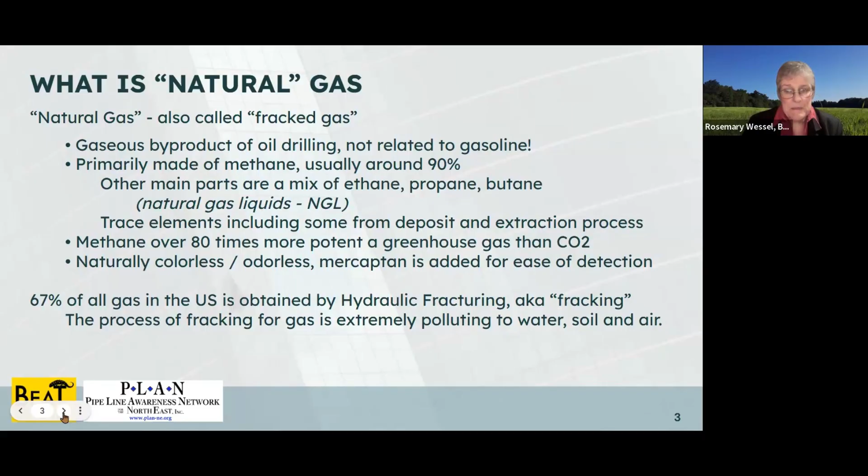from the extraction process. Methane is over 80 times more potent a greenhouse gas than CO2. So when it leaks into the atmosphere, it has a lot more punch than if it's actually burned. It's also naturally colorless and odorless. Folks may be familiar with the smell that they get when they get gas service. You get a little scratch and sniff card. That's actually mercaptan. That's a chemical that's added to the gas so that it can be detected in your home.

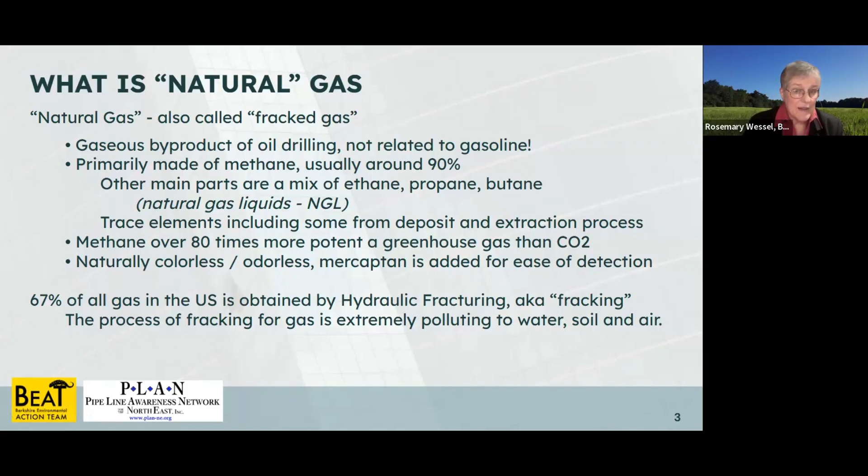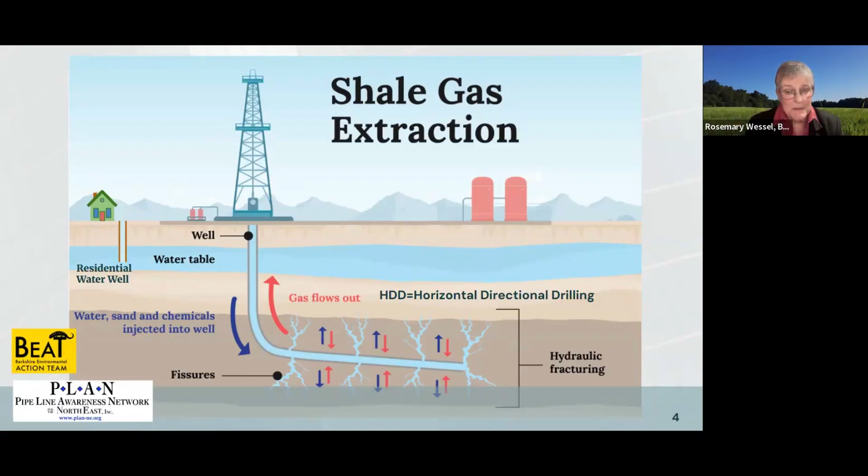67% of all gas in the US is obtained by hydraulic fracturing, otherwise known as fracking. And the process of fracking gas is extremely polluting to water, soil, and air at the extraction site. Shale extraction is how they drill the gas out of the ground. It uses a process called horizontal directional drilling. So they go down first and then they can bend at like a 90-degree angle. And then they break apart the rock to get the gas pockets out of there. A lot of people think that you just put a well down and the gas just bubbles up, but they actually have to fracture the rock to get it out.

So the Marcellus Shale is the one that's closest to us, and the Utica Shale is underneath that. That's in New York, Pennsylvania, West Virginia, and Ohio. The Marcellus Shale is about 4,000 to 8,500 feet down, and way down below that, 6,000 to 14,000 feet is the Utica Shale. And the proximity of New England to this large source is one of the reasons why they keep trying to get more gas through here. They keep seeing it as an easy thing that they can tap, but it's much more complicated than that. So we're going to take a look at the infrastructure of the gas transmission lines.

So why pipelines? Why does the industry like to use pipelines? It's a safer means of transport for gas, safer than vehicles or trains, but it still has accidents. There were 263 significant incidents in 2024 alone. It only becomes liquid when it's cooled, then it's LNG. That's when it goes into storage tanks, transported by ship, through truck. But the process of gasification and degasification has a lot of its own problems. So that's not any better way to transport.

So yeah, the intrastate pipelines are the distribution networks of our gas utilities, known as local distribution companies or LDCs, you'll hear them called, like Eversource and Boston Gas of National Grid and Berkshire Gas. And the interstate transmission gas pipelines are the pipes that move that gas around the US from those shale plays that Rose was talking about. For us, they bring the gas from states like Pennsylvania or up from the Gulf or down from Canada.

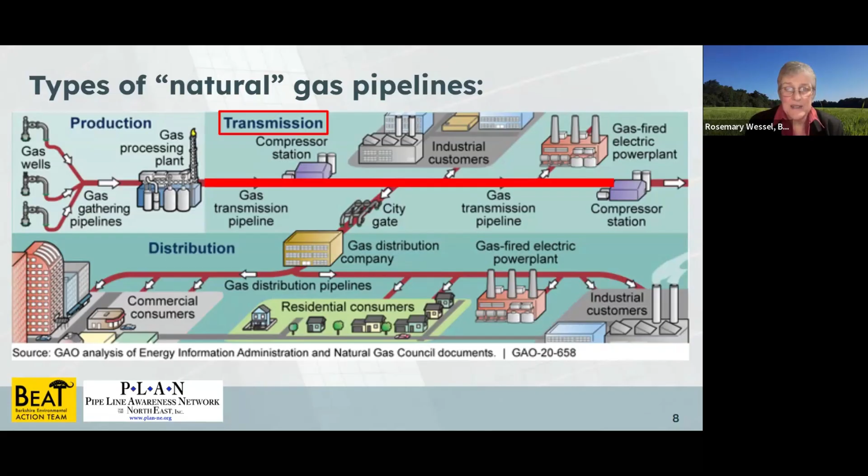And then at the end use, there are gate stations and laterals that bring it to distribution companies. Some of those laterals go directly to industrial users. The rest goes to gas companies, like your Eversource, your National Grid, Unitil, Berkshire Gas, that are part of the distribution network. And again, we're looking at the transmission pipeline, which has its own set of infrastructure.

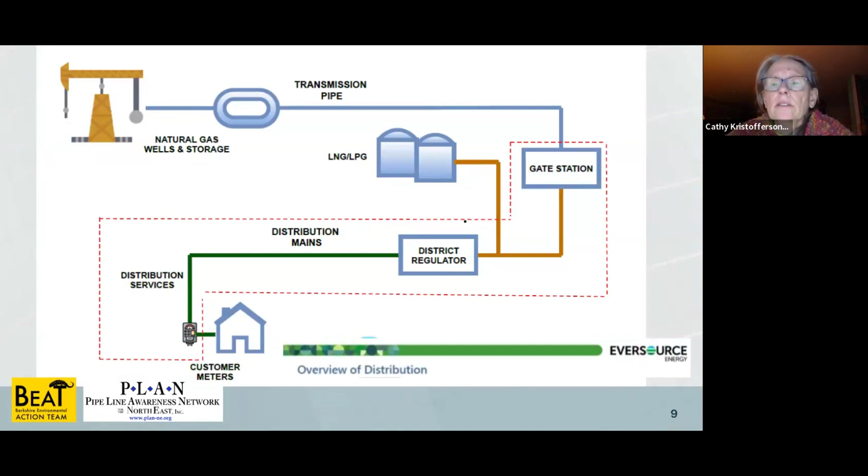Next. And this is a diagram of the typical gas system highlighting the distribution system, taken from an Eversource filing. You can see their system in the middle there outlined in the red dashed area. Before them is the interstate system transmitting the gas from the well to their system. And after their distribution are the customer service lines and meters on the buildings.

Next. And I wanted to include this map. It shows just how many pipelines we have in the US. The blue lines are all interstate pipelines, and the gray ones are intrastate. Those tend to be gathering lines and smaller laterals that bring gas to the main transmission pipeline systems.

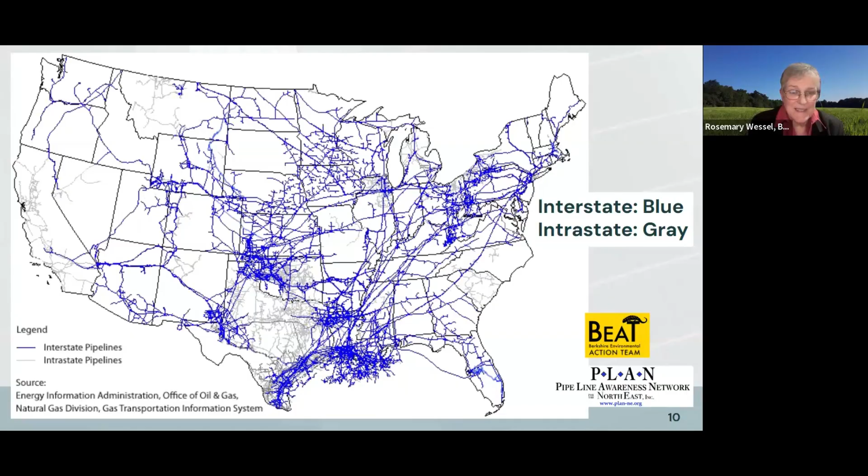And these are the existing gas transmission systems in the Northeast. You'll see there are two blue ones coming in from the west. Those are both Tennessee Gas pipelines. One comes through Pennsylvania and up into Connecticut to Massachusetts. The other one comes across upstate New York into Massachusetts. And the other one that we deal with a lot is the unfortunately named Algonquin Pipeline. That's an Enbridge company. It comes up through Connecticut into Rhode Island and Massachusetts.

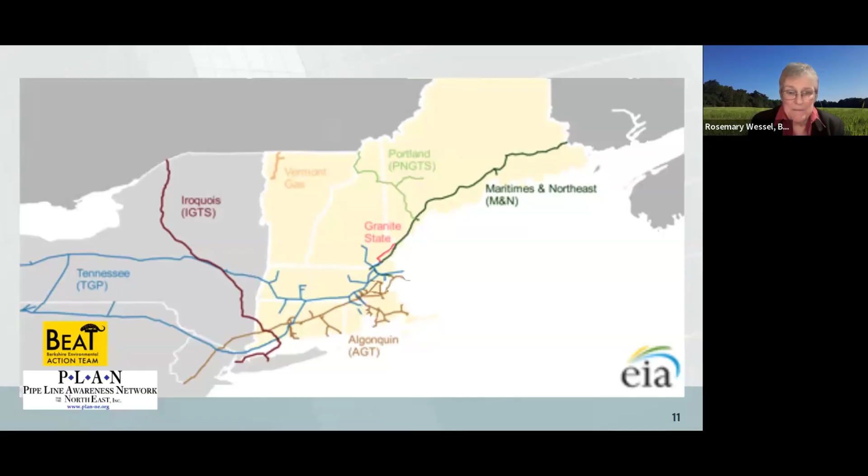Then there's also the unfortunately named Iroquois Pipeline, which comes out of Canada down through New York, part of Connecticut, and then back around to Long Island. There's also Maritimes and Northeast, which goes up towards the Canadian Maritimes. The other two actually bring gas out of Canada. That's the PNGTS and Vermont Gas. The others are all bringing gas up from the Marcellus Shale and areas further south. I think the Iroquois brings gas down too.

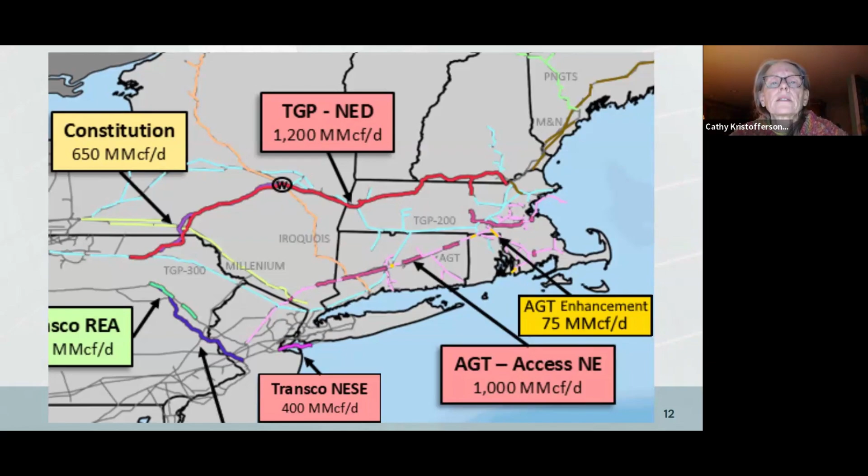Okay, so when you're looking at the actual structure of the pipeline, it's really important to make note of the diameter of the pipeline and also something called the MAOP. That stands for maximum allowable operating pressure, and that's the highest pressure at which a pipeline system is allowed to operate. The pipeline companies prefer to have the highest MAOP they possibly can so that they can pack as much gas as possible into a system.

The intended MAOP determines the strength and the thickness of the steel used in the pipeline walls. Some of that depends on how dense the development is around a pipeline. We have an appendix to these slides that gets into the different classes. So if you're in a rural area, you get a thinner pipe. If you're in a more urban area, you get a thicker pipe that has more strength.

MAOP combined with the pipeline's diameter determines the potential impact radius and affected impact radius. So we're going to get more into what those mean in the next few slides. Sometimes pipelines are designed for a higher pressure, but they promise to run at a lower pressure, but then they'll up it after approval. They'll either apply for a waiver to go with a higher pressure, or they'll have another proceeding to up the pressure on a pipeline after approval. That's something to look out for when a pipeline is applying for permits.

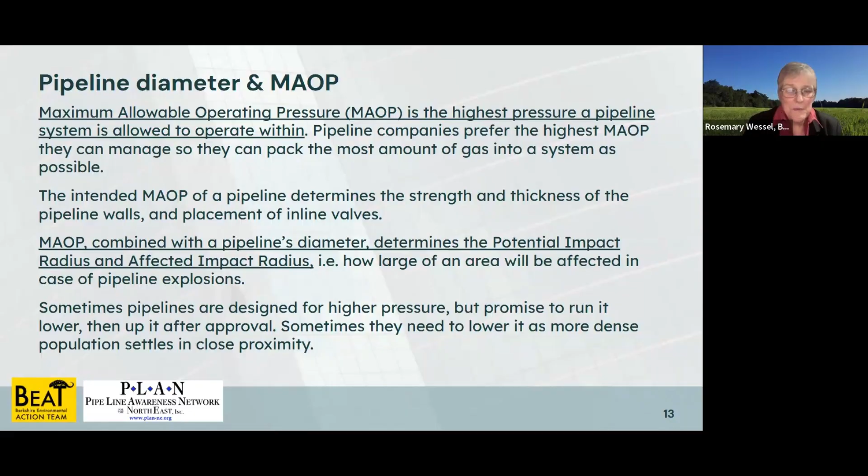Yeah, and this slide shows the various sizes of pipes we've seen installed in our area recently. The AGT West Roxbury lateral up there in the top left corner had 16-inch pieces and 24-inch pieces. The two bottom corners both are 42-inch pipelines in Connecticut and New York, and in the middle shows the Tennessee 36-inch pipe added. It's the third pipe in parallel in that existing and expanded easement through our state forest in Sandisfield.

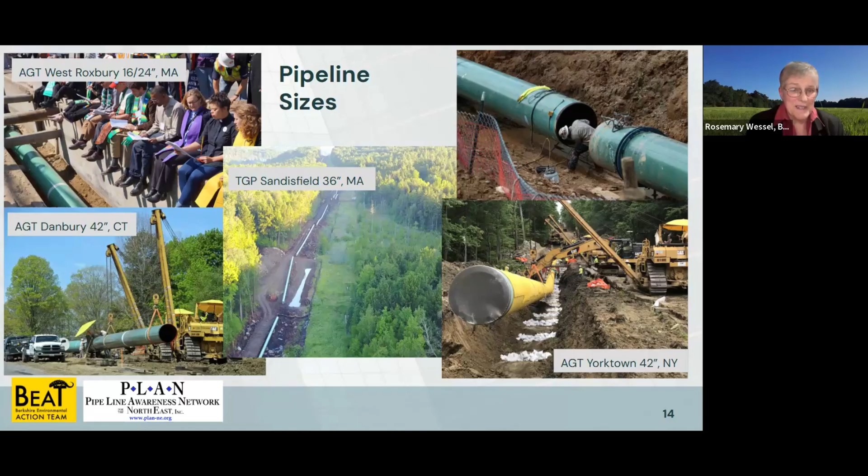And the top right corner, I just put in there, it's not in our area, but it gives you a really good idea of how huge these pipes are, because that's a guy standing there welding the two pieces together. Yeah, a 42-inch pipeline is basically chest height. Yeah. Large. Next. So this is more detail on the potential impact radius.

It's worth noting that the industry itself also refers to this as the incineration zone. So this is the zone around a pipeline at which things are really destroyed if there's ever an explosion. It can be severe damage or total damage within that zone in case of an explosion. And it's worth noting that that impact radius is a radius. That means that the zone, however many feet it extends, is on either side of the pipeline. It depends on the pressure at which the pipeline is operating at the time, times the diameter of the pipeline.

The affected impact radius is an outer ring outside of that, where damage happens, it's just not as severe. And also that's calculated using the same MAOP and diameter. Less damage is likely. It includes singeing vegetation, maybe if you have vinyl siding, your vinyl siding might melt, your windows might implode, but it's not total structural damage like in the PIR. It's also the zone that's most likely to be evacuated during gas leaks or other incidents.

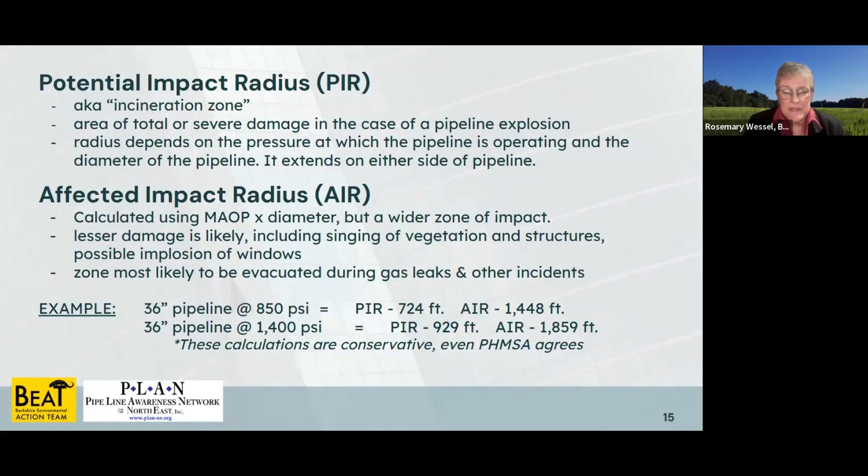And I made a couple of examples comparing different pressures. If you have a 36-inch pipeline at 850 pounds per square inch, the potential impact radius is 724 feet. But if that same pipeline then ups its pressure later on to say, no, we'd like to run at the 1400 PSI for which it's designed, that goes up to 929 feet.

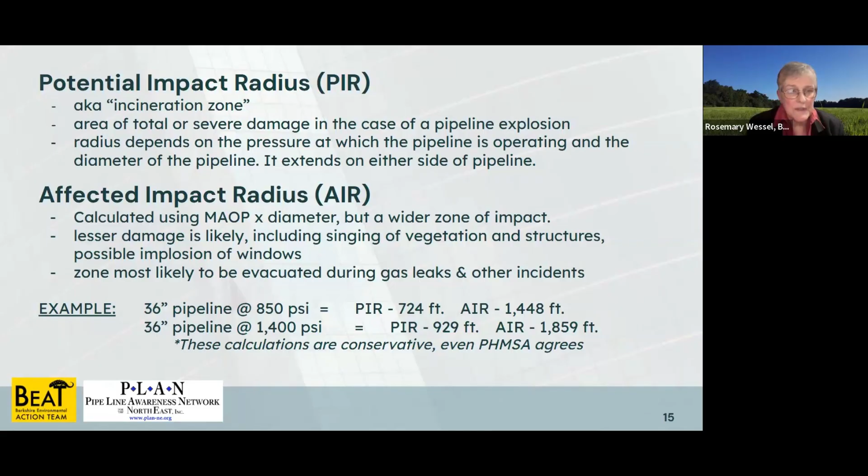And these calculations are fairly conservative. Even the Pipeline and Hazardous Materials Safety Administration that designed this agrees that it's a fairly conservative calculation. They can be higher depending on a whole host of conditions at the scene.

The PIR also helps determine high consequence areas. High consequence areas are zones within 220 yards of a pipeline with high occupancy dwellings or sites where people congregate. So this can be hospitals, daycares, prisons, retirement homes, assisted living, anything where a lot of people congregate that happen to be in the PIR or the AIR.

And I took a couple of examples from the currently proposed intrastate pipeline. That's the Eversource pipeline that they want to put through Longmeadow and Springfield. We mapped out the actual pipeline route and identified the potential impact radius in red, and then the affected radius in yellow. And you can see where it goes by the Basketball Hall of Fame.

The whole front of the building is well within the PIR. Also, about half of the Hilton Garden Hotel is within that space. And a little bit further down the pipeline route, you get Longhill Street Apartments. That's within the PIR.

Sumner Place Apartments is within the AIR, so they're likely to sustain damage. Also, Sumner Avenue Elementary School is right in there. So when there's a proposal, it's really handy if you can get a map of where it's going to go and get someone to do some mapping to figure out what's going to be in danger.

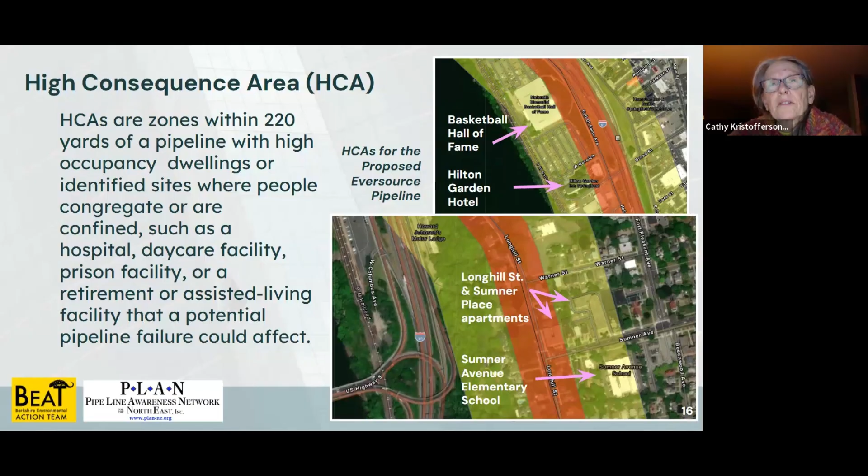And also, Rose, that's Route 91 in there. Yeah, it also overlaps Route 91 and that lovely interchange for the Longmeadow exit.

So accidents and incidents: as noted, there are several hundred significant incidents every year in the U.S. The average deaths is about 12 per year and 55 injuries per year associated with these. And it can take the form of fires, explosions, or leaks. The most common cause is corrosion, particularly where a pipe has a bend and a weld for that bend, or if there's a juncture where the weld started to corrode. It can be equipment failure. It can also be things like dig safe accidents where somebody struck a pipeline.

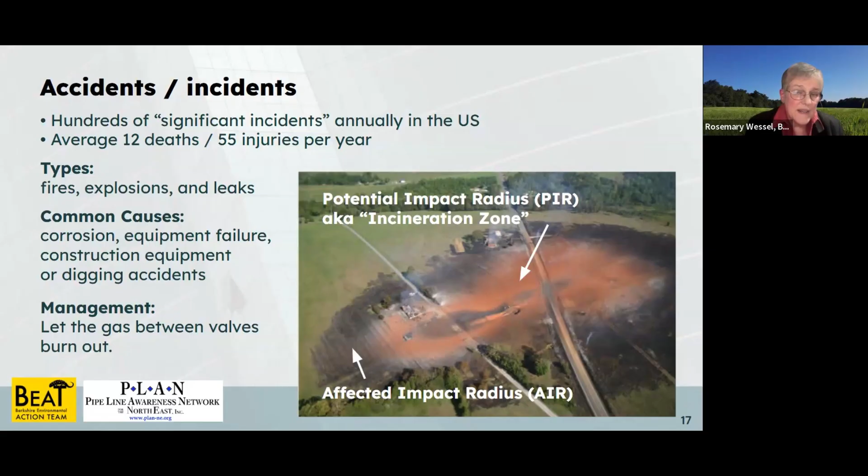But what you can really see is where the incineration zone is. Most of them, if you look them up, you can see picture after picture from different explosions. There's an area that looks red, and that's where everything has just been vaporized by the size of the explosion. And then the outer ring is where the affected impact radius is. So that's where vegetation gets singed and houses may sustain damage, but probably not structural damage.

And when determining when there's looping, that's when they lay pipelines down next to each other, parallel to each other. They say that you want to look for the PIR for both pipelines on the outer edge, and that will determine what the actual potential impact radius is. But it's worth noting, for instance, some of the AGT enhancement has a much larger pipeline being laid down next to a smaller pipeline. That larger pipeline's PIR is going to outweigh the smaller PIR of the smaller pipeline. So you need to look at what the actual radius is from the largest pipeline to determine what the zone is.

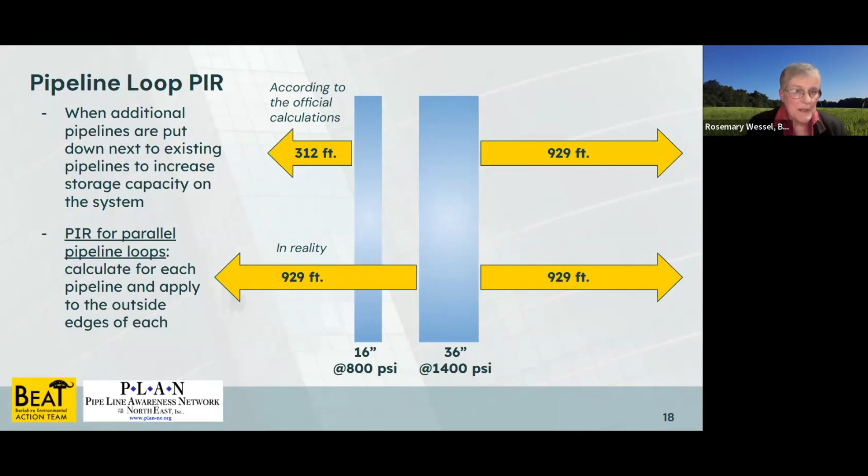So that would leave both pipelines within the other's incineration zone, correct? Depending on how far apart they are, yeah.

And this slide is a screen grab from an Enbridge video that helps people understand what pipeline looping actually is. So it's sort of a second pipe running in parallel to the main line. And as Rose said, sometimes the loop is bigger than the main line. But anyway, it comes out of the main line, runs along parallel, and then connects back in. And it can be like this for miles or for a short distance. But what it does is it provides additional pipe space for expanding the capacity and how much gas is being held or stored nearest to the use. Next.

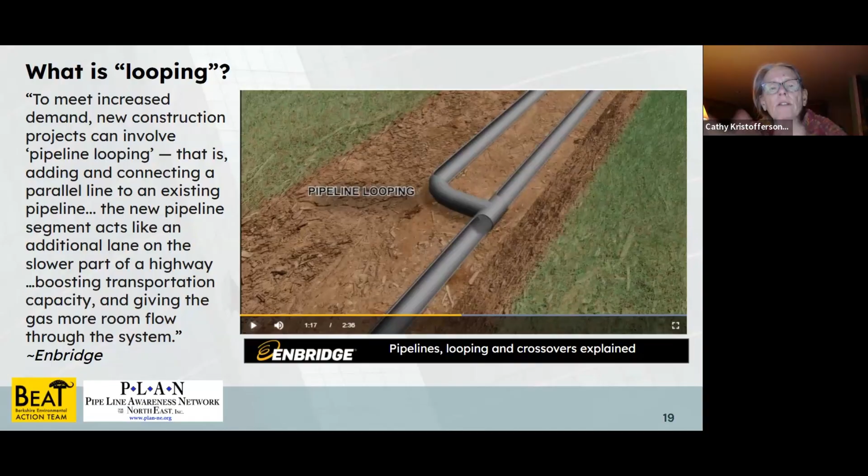So pigging facilities: when I first saw this on my first pipeline application that I looked at, I assumed that it was going to be running near a pig farm or something, but no, PIG is pipeline inspection gauge. These are basically big squeegees that they put into a pipeline. The pigging facilities have launchers and receivers where the pipeline comes out of the ground and they can insert the pig into the pipeline, and it runs through the pipeline to squeeze out any fluids or other contaminants that may have built up in a segment of pipeline. And then when it comes out the other end, it comes out in a receiver. And if you ever see pipes sticking out of the ground like that, that's what this is for.

It's a pigging operation. And if you look at the center indicator on this photo, there's a vent valve on these. That's because they need to vent out the gas from the system to be able to put the pig in there and send it along its way or take the pig out on the other end. So this is one of those points in a pipeline where they vent methane without burning it. And remember what we said about it being 80 times more potent than CO2 as a greenhouse gas. This is one of those sources of pure methane going out of the system.

And I'll just add on the pigging stuff that the recent expansion in Lowell, Mass, was done so that all the pipes were the same size.

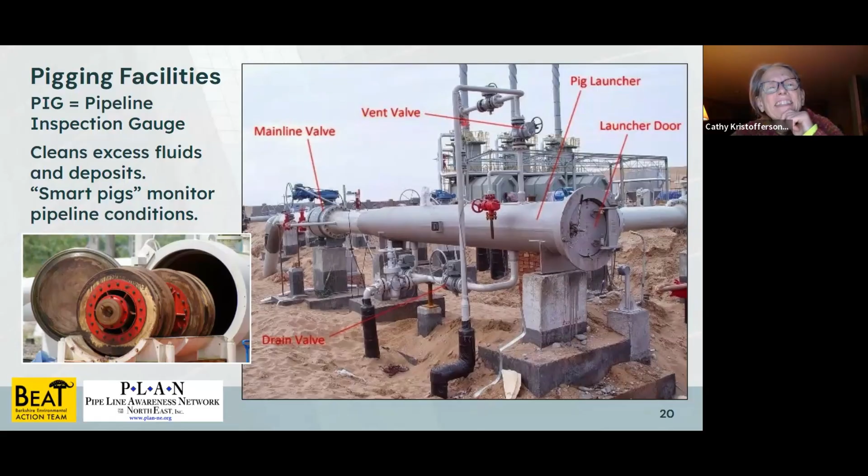So compressor stations are another main component of a pipeline's transmission system. Compressor stations are large turbines that run on gas. They keep the gas moving along in the pipeline. They also help pressurize the gas to that high pressure at which the pipeline runs.

The turbines themselves run on gas so you get CO2 emissions there too, and combustion emissions. So aside from having methane leaks, you also have CO2 emissions, which bring particulate matter to the area around these plants, and that's very hazardous for health. It's very small particulates that can get deep into your lungs and even into your bloodstream. So wherever they're burning the gas, like a compressor station, there's that added type of pollution.

They say compressor stations should be placed every 40 to 100 miles, depending on terrain. One thing of note is the Constitution pipeline proposal only shows it at either end, and it's a 124-mile pipeline, and they have to get over the Catskill Mountains. So it's likely that there's another compressor station necessary, and certainly if they ever wanted to up the pressure on the system, they would need another one. Sometimes a pipeline company will file with the bare minimum of stuff and then file another proceeding to bolster that existing system, so that's a possibility.

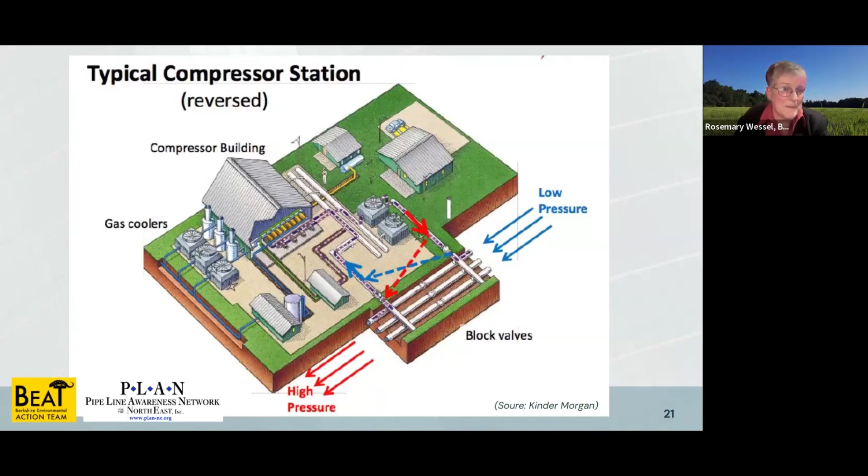So like most gas infrastructure, they smell of mercaptan from that venting of raw methane with odorant in it. Not all of the interstate pipelines have odorant in them yet—it depends on state law. In Massachusetts, they do have to have them.

The other common infrastructure you might see around, always within chain link fences, is the metering and regulating stations. These are to both meter, which is to measure out the gas added in or put into a transmission pipeline, and the regulating half of the station is to lower or raise the pressure of the gas moving from one system into another.

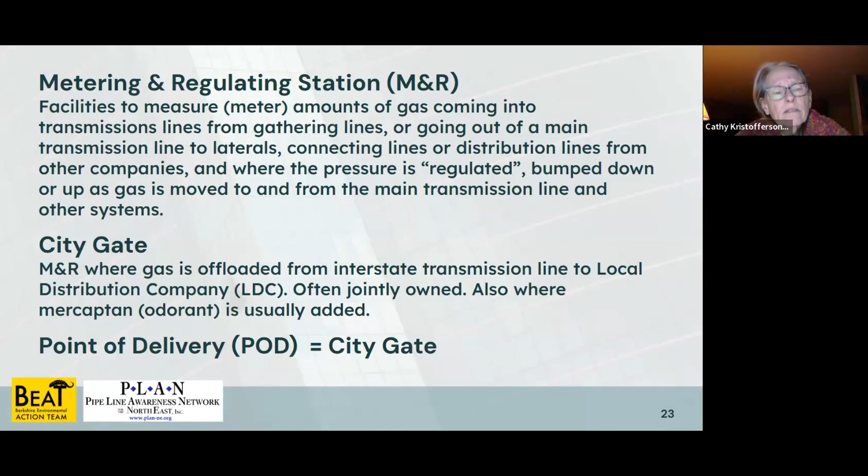These are just a few of the M&Rs we've seen activity at recently: the AGT West Roxbury on the lateral, and Tennessee's Southwick M&R. Coventry, down there in the bottom corner, we just saw the regulator added to their lateral where somehow there was no regulation of the pressure before. And the TGP in the bottom corner, the city gate in East Longmeadow.

In the center is the famous AGT Lincoln metering station with Tennessee Gas—that's an interstate to an interstate, sitting on a wooden broken pallet right next to Route 2 that you can see up the embankment there. Luckily, that deteriorating situation was upgraded last year and put in a box so that it's not so open to accident.

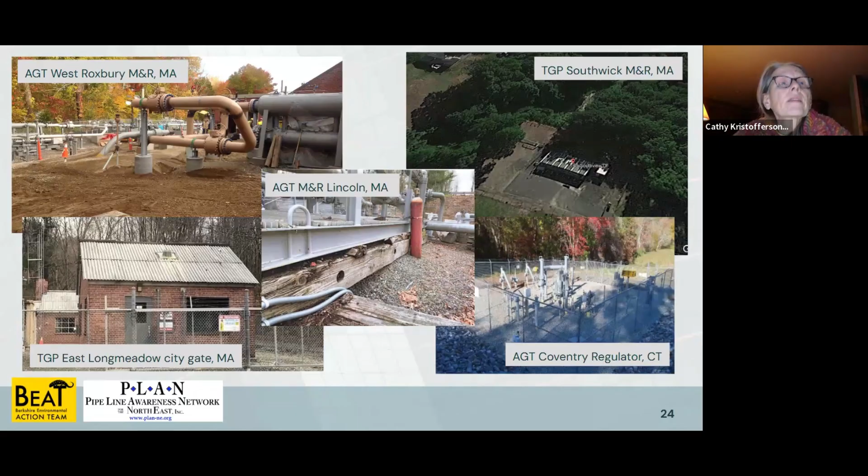Pipeline system management is largely run remotely. I actually thought I was calling the Tennessee Gas headquarters one time, and I got a lone guy in a station in Georgia who was monitoring all the gas pipelines, including up into New England. So they're run remotely from wherever their central pipeline management office is. In the case of Columbia Gas, the LDC in the Merrimack Valley, that center was actually in Ohio. They were working on replacing some of those lines at the time in the Merrimack Valley, and the system didn't realize why parts of the system were depressurizing. So that automated system kept repressuring and upping the pressure to try and compensate for a low pressure signal it was getting. Because there wasn't somebody there on the ground, they couldn't just call somebody and say, hey, what's going on? And that's how Merrimack Valley ended up with fires and explosions all along that system.

Some say they have a field office, but usually that field office calls in the pipeline folks from headquarters to come and manage. And the way that they treat emergencies, they can't put out the fires when they start to burn - the gas needs to burn off between valves. So local training for emergency services is mostly secure the area and call the pipeline company. There isn't a lot you can do.

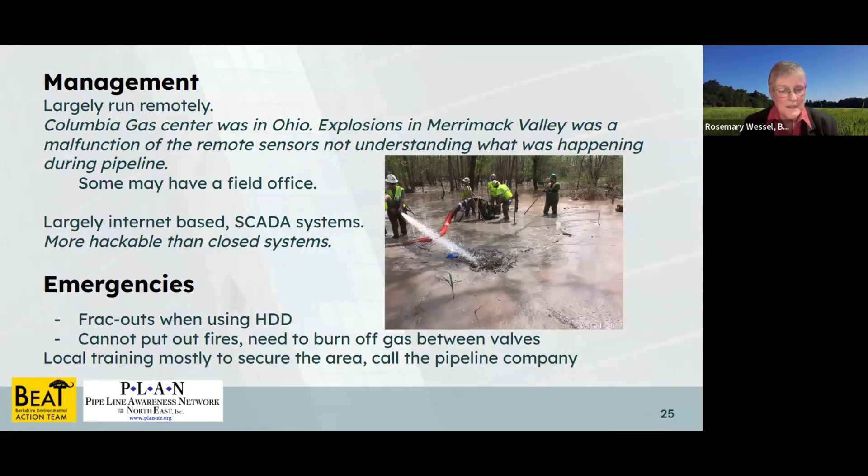Enbridge has a pretty high rate of these. They had some under the Sakonnet River under Narragansett Bay when they were replacing that pipeline underneath there, as did Tennessee Gas when they were drilling underneath in Agawam.

Now we're going to review some of the ways that pipeline companies are expanding their transmission systems. They can expand their system while doing maintenance, like we saw in the Sakonnet River project - they were fixing some leaks in an 8-inch pipe, and they did that by replacing it with a new higher pressure 16-inch pipe.

Or they can expand by adding on infrastructure such as the looping we saw, lift and lay, or take up and relay - however they want to call it - which is taking up a small line and putting down a big line to replace it. Or by increasing horsepower for compression, like Iroquois had a whole project called expansion by compression, where they went through their whole line and increased the horsepower in every compressor station.

And Tennessee, as I mentioned, keeps expanding in Agawam, or expanding with new pipeline segments like Algonquin had proposed in the Access Northeast project, where they had two new big long line segments to directly connect to a new offtake, or a place that really needed gas without it working its way through the system. And Tennessee adds looping and compression in the Connecticut expansion in both Massachusetts and Connecticut.

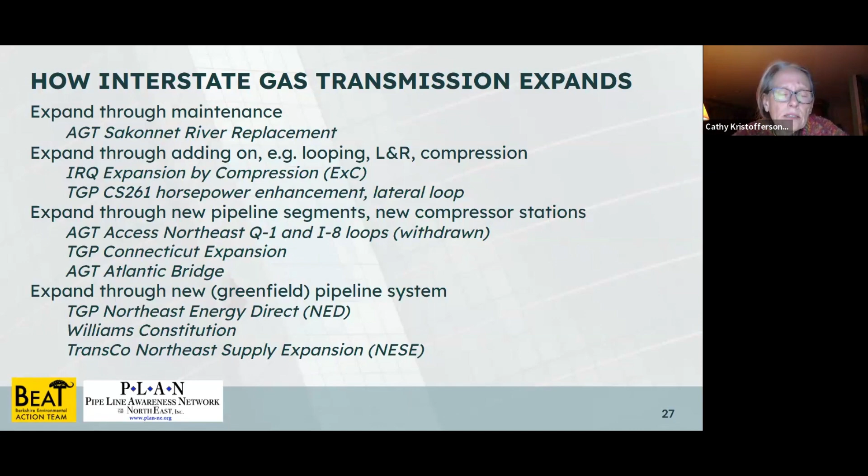And AGT, as we all know, famously added the new compressor in Weymouth at the Atlantic Bridge project for an existing line that was there and running. Or they can add a whole new pipeline system, like the NED, the Constitution, or the NESE that we mentioned in New York.

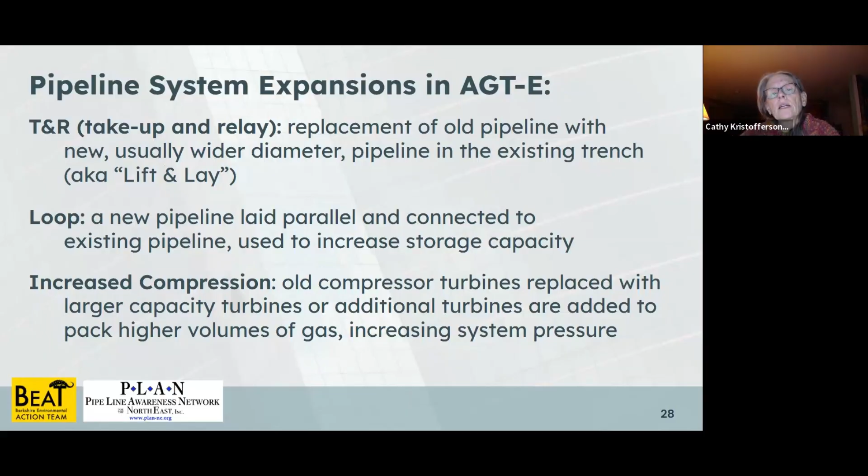And in fact, that's exactly what we see being done in the AGT enhancement or RARE project. So they are doing all of the above - they're doing some lift and lay, they're calling it take up and relay, it's the same sort of thing, along with looping and increased horsepower.

Now we're going to review the federal permitting for pipelines at FERC. There are kind of two buckets of federal permits for pipeline projects that come out of FERC, the Federal Energy Regulatory Commission.

One is a blanket certificate for small projects that are not designed specifically for capacity increase, although they are allowed to incidentally increase capacity, but they're supposed to be more for maintenance and other certain types of activities. The other is the certificates of public convenience and necessity for new or specifically capacity increase expansion, which is like that AGT enhancement. Blanket petitions get decided almost right away or within a few months. The full certificate process can take a couple to a few years, depending on its complexity. And I'll just pause here and explain the NEPA.

NEPA defines the environmental review of all these projects. An EA, or environmental assessment, is a concise review document taking into account the purpose and need of the proposal, any alternatives that could be done instead, and a brief review of the impacted environment.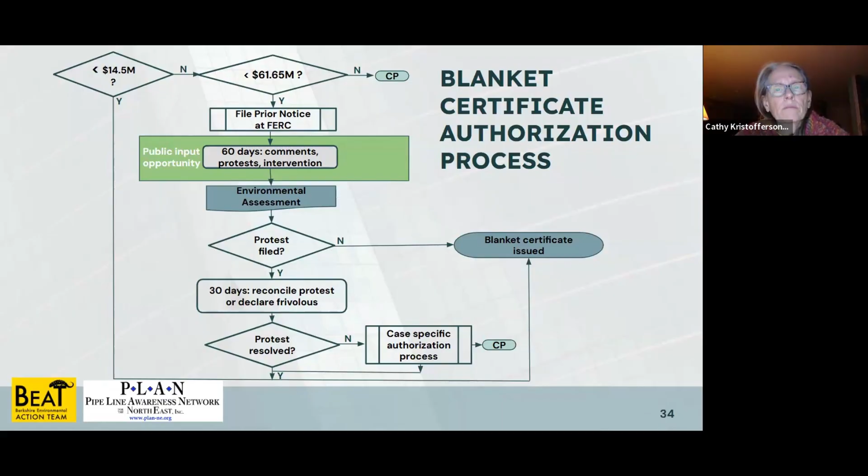Additionally, there could be state versions of these permits that they will need to get. Like in Massachusetts, we have a MEPA process, which is similar to their NEPA process. And state siting boards might want to do some advisory review along with the state required permits.

I would note that the federal government is trying to squash a lot of these in their efforts to rush through the fossil projects and our energy supremacy situation, but I think we'll see how far they get with that in this Constitution proceeding, because so far New York does seem to be sticking to their denial of the 401 water quality, denied way back in that 2016 proceeding, even though unfortunately New York folded on that exact permit in the NESE revival. So we'll see what the federal government can do in their pursuit of all things fossil.

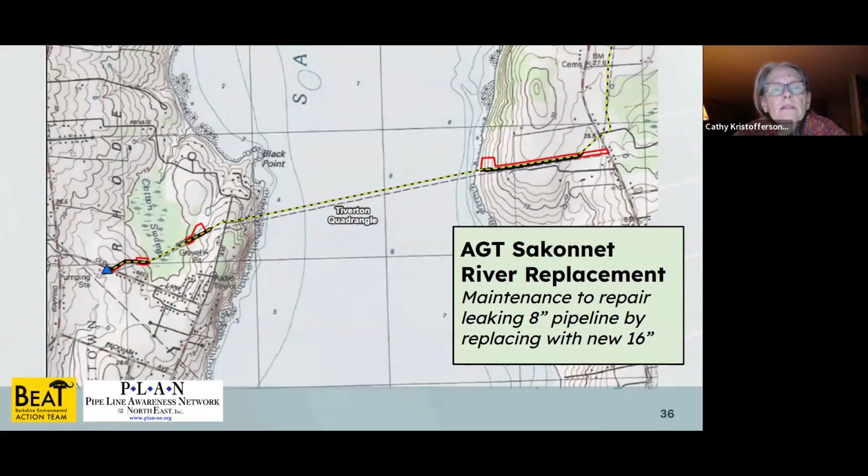They did go with a pre-file down at the Cape Cod project that's being proposed at the moment at FERC, and under the proceeding, they have done the pre-file and gone on to the CP filing. So we'll see what they want to do. This one is much smaller, the AGT enhancement.

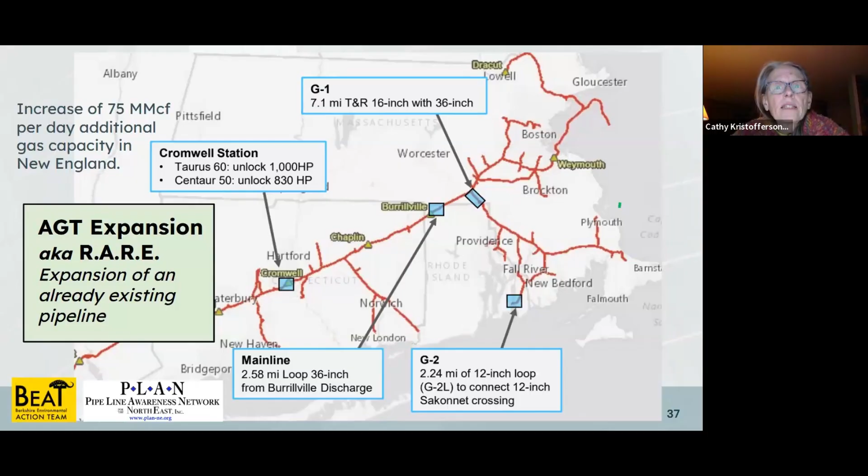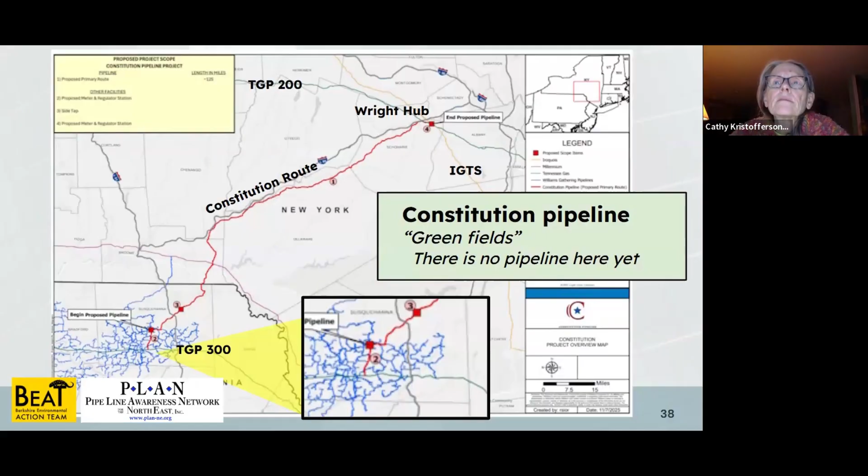Yeah. And this just shows the Constitution pipeline, because this is a big greenfield pipeline. So they call it greenfield when there's no brownfield yet, because they haven't come through and taken all the vegetation away. So it starts down there, and you can see in the very fracking area of Pennsylvania, and goes on up to the Wright Hub, which most of us from the Kinder Morgan NED days knew was where the NED pipeline was going to start.

But it's also the interconnect of the Constitution pipeline, the Iroquois pipeline, and the Tennessee Gas pipelines. So we'll have to see if they build that, and they build what they're calling the Wright Interconnect Project, what will be revived to bring gas to New England. Will it be the Tennessee Gas pipeline NED or the AGT Access Northeast, or what they'll do?

Because, as we hear, our pipelines are constrained, so they don't have room for more gas. So building that Constitution to bring gas to New England will require additional interstate expansion. Next.

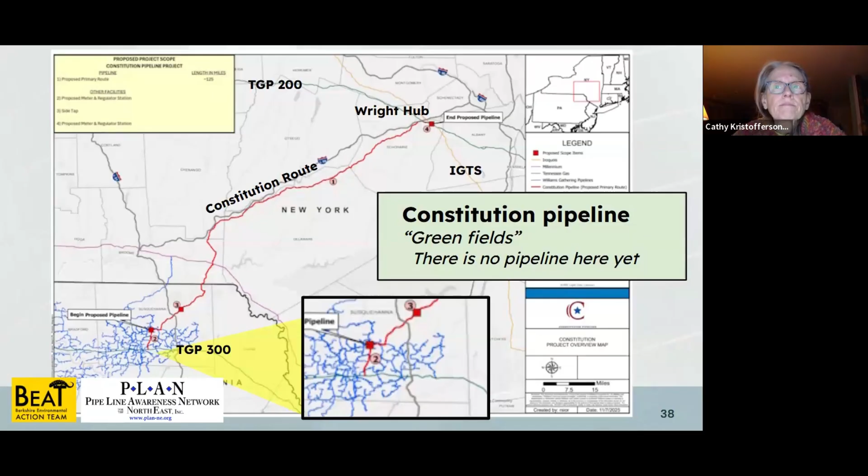So next, we're going to be talking a little bit about working with FERC. The Federal Energy Regulatory Commission regulates interstate gas and oil transmission pipelines. They also regulate interstate electric transmission. It's made up of 5 commissioners, and the 5-year terms are staggered so that they're replaced on sort of a rolling basis. They're nominated by the president, and they need to be approved by Congress.

And there needs to be a 3-2 party split. So at any time, there could be 3 Republicans and 2 Democrats, or 3 Democrats and 2 Republicans. It's to try and balance out the political leanings. One of the things that's most notable is it's usually industry veterans. It's people that either worked in the gas industry or somewhere in the regulatory agencies, and they kind of pop in and out of those roles between FERC and working with industry or with regulation.

FERC's budget comes from annual charges and fees that are from filing from the natural gas companies that are applying for permits. So they're funded by people who are looking for projects, which seems like a bit of a conflict of interest. Yeah, to say the least. The slogan among some is that they're the rubber stamp agency for that reason. Next slide, please.